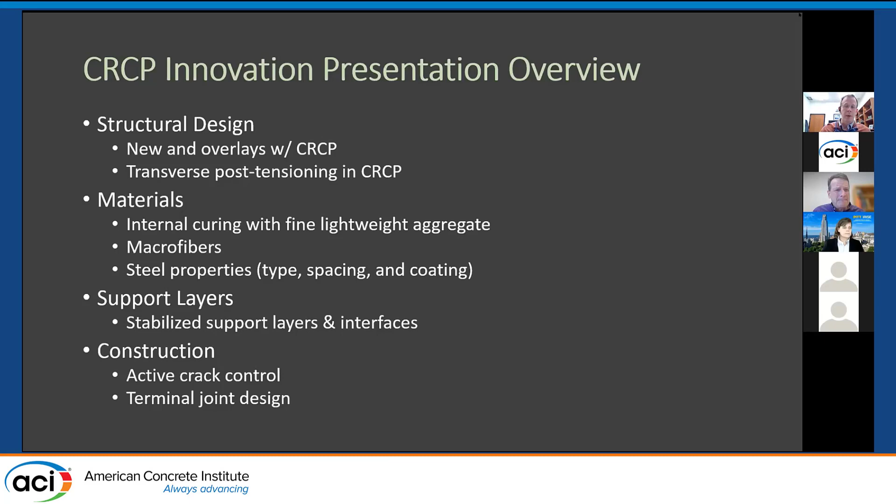And finally, as Shiraz spent a lot of time on, construction details are very important. So a few that are interesting in terms of what we found recently about them - Shiraz was involved in some of these as well - both with active crack control and terminal or transition joint designs.

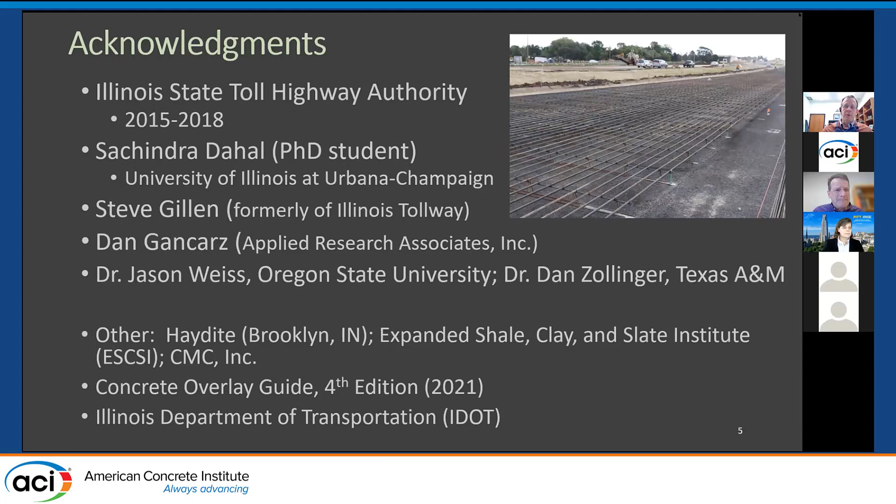So I'd like to thank the Tollway, who originally funded a lot of the stuff that we'll see. Shiraz was kind of a consultant for this project, providing feedback on this Tollway test section that allowed university professor types to build a bunch of different interesting test sections on a real live road. So a lot of what you'll see today is related to this Tollway test section.

And so as we thought about how do you make CRCP perform better and last longer and not have premature failures, you really want to avoid irregular cracking patterns. So one of the things we looked at in this recent study was how could we use internal curing possibly as a way to produce better controlled and spaced cracks, both in terms of crack width and slab dimensions.

This was their original motivation, as well as making this a very cost-effective pavement type, because you need to deal with that relative to its service life.

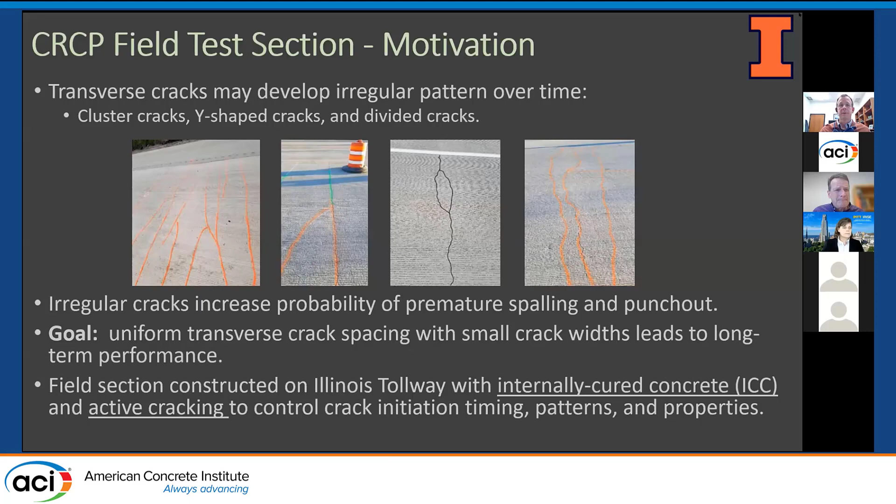If you're not familiar with internal curing, which has been used a lot on test sections on bridges, it essentially is pre-wetted saturated lightweight aggregates that are manufactured and expanded. These porous aggregates are saturated with water, and as the concrete hydrates—especially at water cement ratios below 0.4, or even above 0.4 when you lose water to the external environment—the aggregates release that internally stored water pretty easily because the pore sizes are so large. That can help provide internal curing to hydrate the cement more.

It produces a more uniform moisture gradient, which can reduce curling, as shown in some work we did—not necessarily for CRCP, but for jointed pavement. So this was one of the ideas we were going to test out.

We had Dr. Jason Weiss and Dan Zollinger on this project, and Dr. Weiss was an expert in this. So we were really excited to see how it could impact CRCP performance.

Could it change crack spacing, crack widths, and performance? For this particular project, we just replaced the sand part of the concrete mix with 37% of the fine aggregate by volume, not by weight. It's not a huge amount of replacement, but from the laboratory work, and even some field testing with slab curling, you can see a remarkable difference when you lose external water.

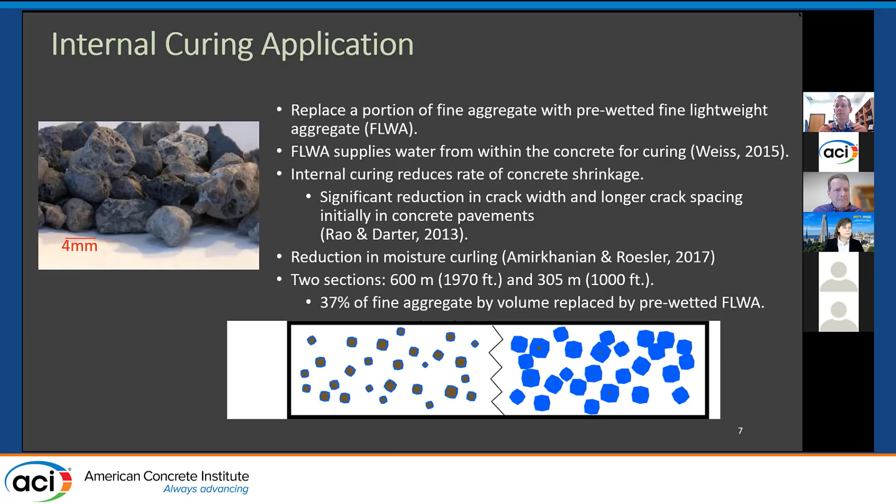Another thing we tried on this test section—and I'll show the results when I explain all the factors—besides saturated lightweight aggregates, we also looked at active crack control.

This had been originally looked at in the 90s by Dan Zollinger on some test sections in Texas. It was recent—we looked at it 20 years ago for the Illinois Department of Transportation, where we saw cuts across the slab with a soft cut. And recently in Belgium, they've cut notches in the side of CRCP.

They were a little longer than this, so we built on what they did and made partial width, partial depth notches, about 2 feet long, spaced every 4 feet, hoping to propagate those cracks in regularly spaced arrangements early, as well as keeping the crack widths tight.

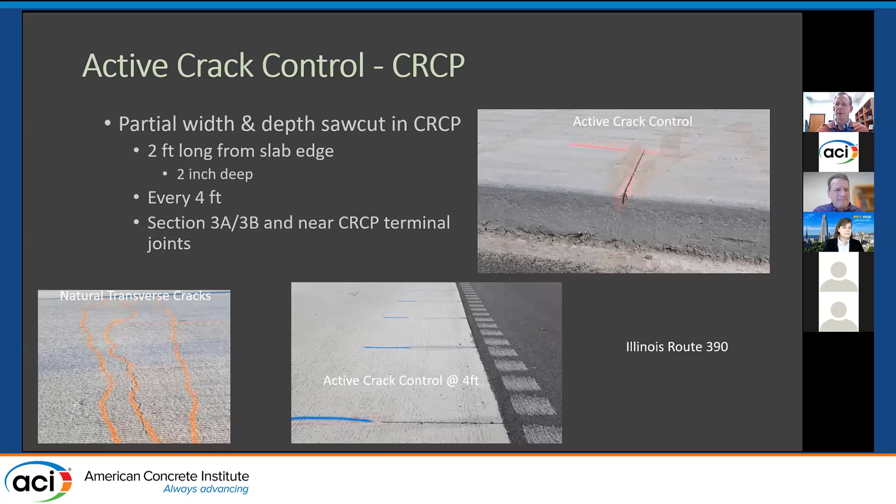We'd like cracks to happen early so that the widths are distributed appropriately and we don't have dominant cracks with very large movements or widths. We really want to avoid this clustering of cracks that can intersect and eventually give a premature spall or punch out that has little to do with being overloaded or fatigued. When too many cracks come together in one location, you can create premature failures.

This test section was located west of O'Hare, and it composed of 3 different test sections. For various reasons, they weren't all in the same exact location. Section 1 was all our internal curing.

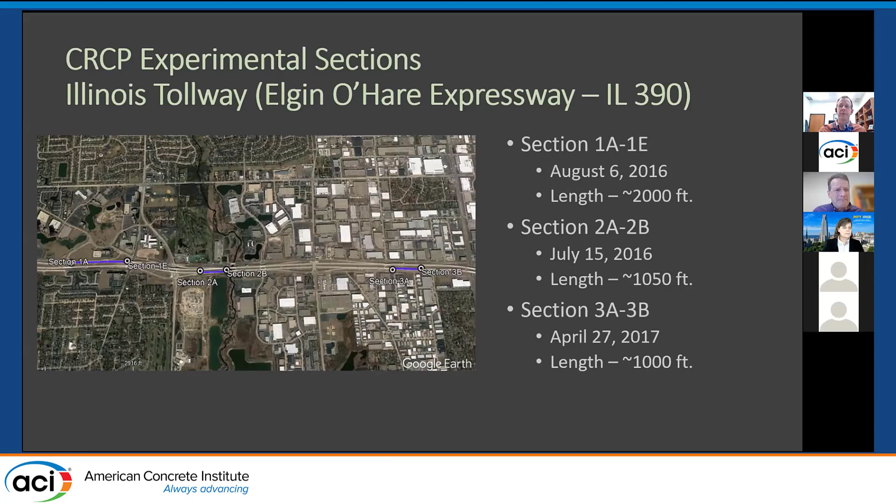Section 2 was our control section. Section 3 had various other internal curing plus fibers, plus it was a little thinner, and it also had active cracking. We appreciated this test section, but in all test sections in the field, you kind of have to go with what the engineers are doing and just make some adjustments. So we didn't control everything we wanted to.

We had several thicknesses, which wasn't ideal, but that's what we ended up getting. We had internal curing on 2 of the sections, and we did active cracking on 1 of the sections. The thing I really want to point out here is the construction time and temperatures were very different for the 3 sections that were paved.

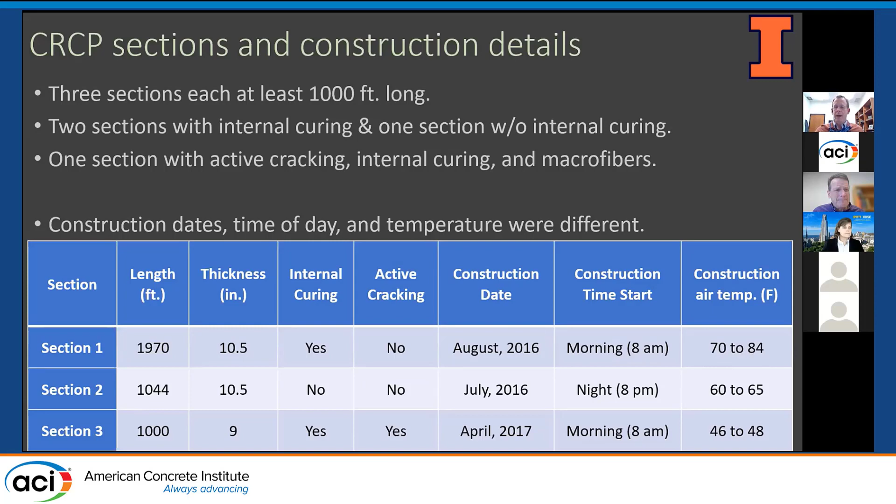One was paved, two of them were paved during the day, one was paved all night. One of them was paved at a fairly high temperature in the summer, another was paved in early spring at a very low temperature. This will likely come back to cause some behavioral differences in some of the measurements we did.

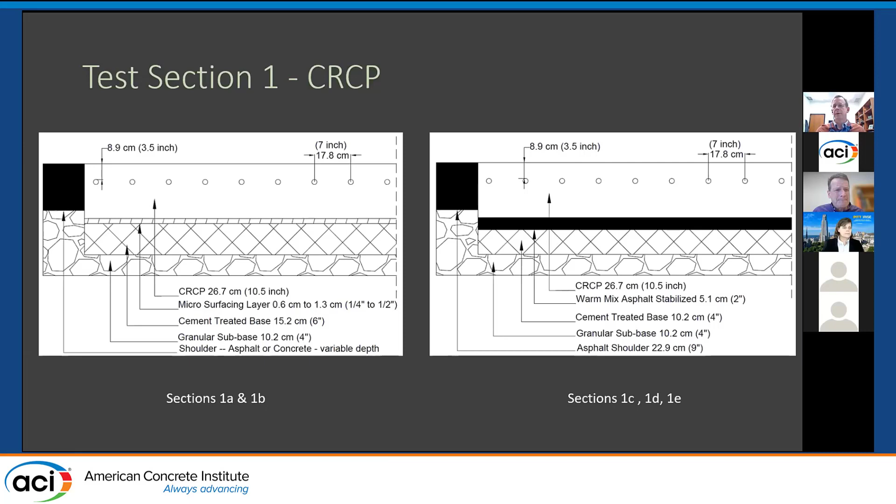So we've been monitoring this over the past 4 years, and this was just published in TRB, some of our findings. What you can see here is really the 3 sections, although they don't end up with the final crack spacing after about 4 years of monitoring. They're generally in the 4 to 5 foot range, with the smallest being section 3, which is the internal cure with the active crack control at every 4 feet. That is varying pretty close to what the target was, which was around 4 feet.

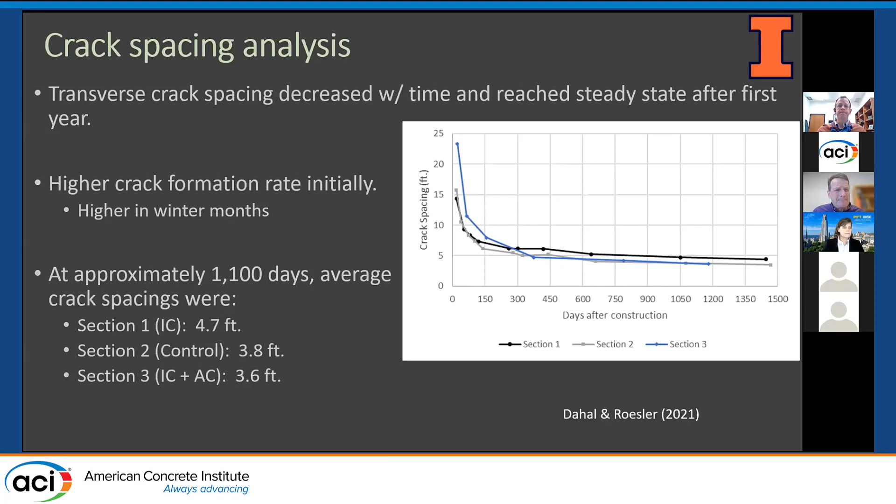But generally 1 to 2 meters are expected with crack spacings for CRCP. What's more interesting is the crack width analysis. As we look at the crack width out at 3 and 4 years, we find some interesting trends. The blue line there is section 3, with the active cracking that was paved at a cooler temperature, and it's about 0.2 millimeters pretty much the entire time it's been monitored. And that's great, the cracks are very tight.

We expect very good performance out of this section. This also has some macrofibers in half the section, further keeping the crack widths very tight. Internal curing initially had lower crack widths and has subsequently had some higher crack widths. There's some reasons for that.

One being that it was one of the hotter days that this was paved during. Anytime the temperature is really hot and then you have contraction from a very hot temperature, you're going to have larger crack widths, all things being equal. So with internal curing, trying to control crack width without controlling the concrete temperature, you have to do a little bit of both. It doesn't mean that internal curing can't have other benefits, but it's not a dominating factor in terms of only controlling crack width if everything else is the same.

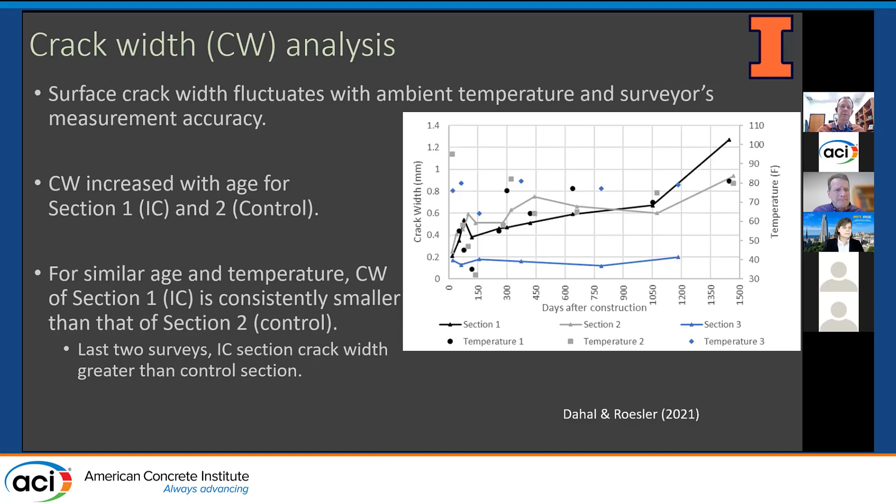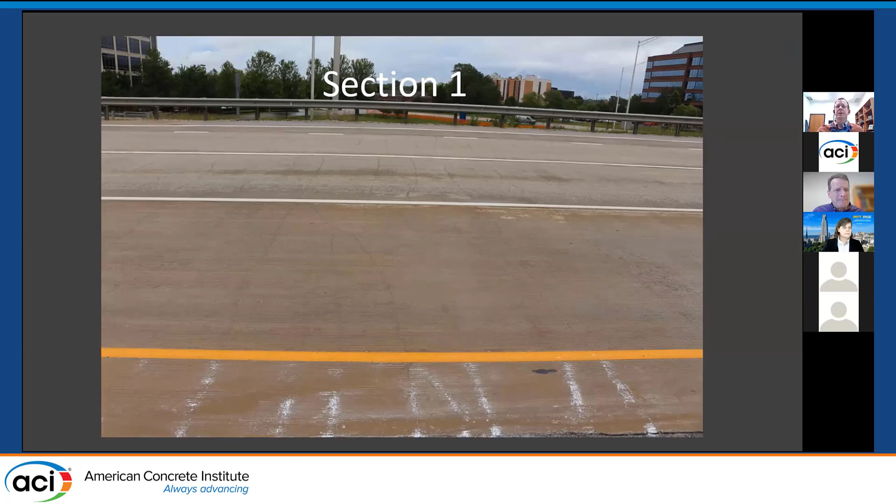And here's section 1, the internal curing section. Typical CRCP crack spacings, you should be able to see those in the 3 different lanes. And this is what it looks like in section 3 when you have these active cracks here. You can see over here in the lane, and you can see how the transverse cracks propagate from them. So we've seen very good success with these active cracks.

They're partial width, only 2 feet, so you don't have to saw cut much, and the cracks propagate across the slabs, and you don't have to saw cut. So we've seen very good results, very good small crack widths. And I'll show some more benefits of this active cracking.

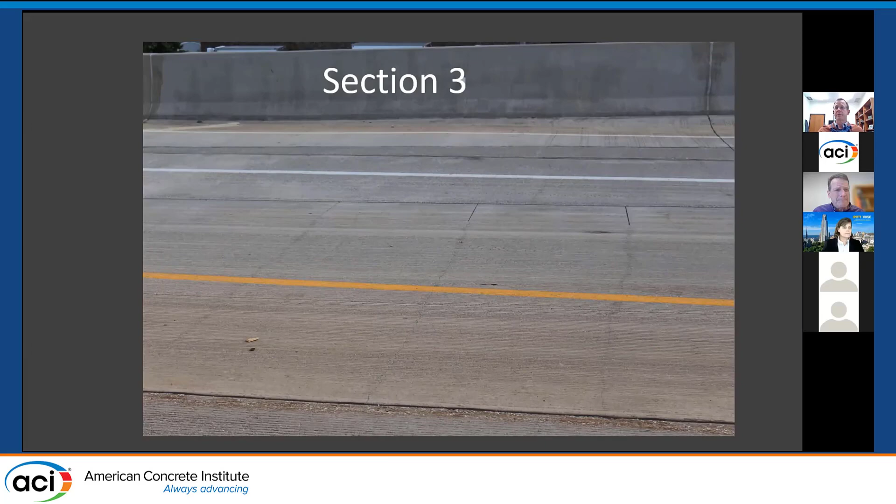One is that you see a lot of the cracks occurring early. You can see here with this chart, 71% of the notches activated in year 1. 85% of the notches have initiated a crack after the first 3 years. And of all the transverse cracks on section 3, 93% of them occur at a notch.

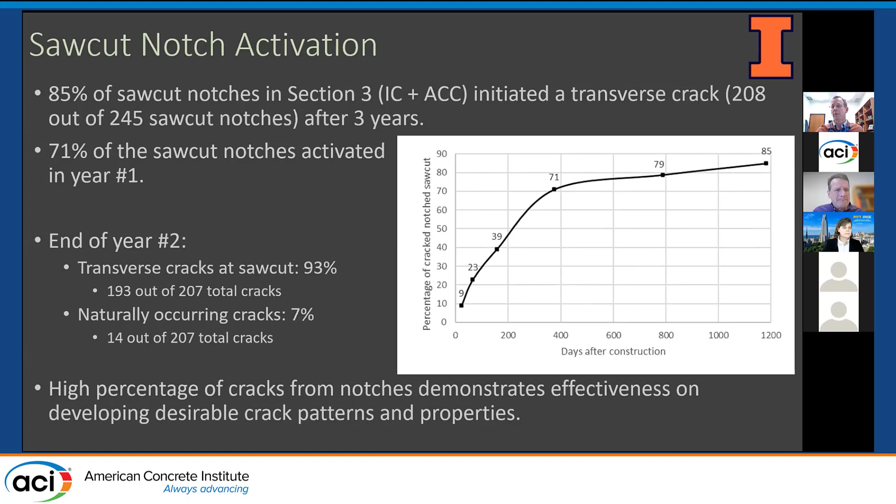So you're not getting intermediate cracks, you're not getting these multiple cracks you see in some of the other sections, even with internal curing when you compare it with the control. And the fact that we're seeing the notches propagate these cracks early says it's a good idea. We're getting regularly spaced cracks, we're not getting a lot of random cracks, and that's good news for CRCP performance.

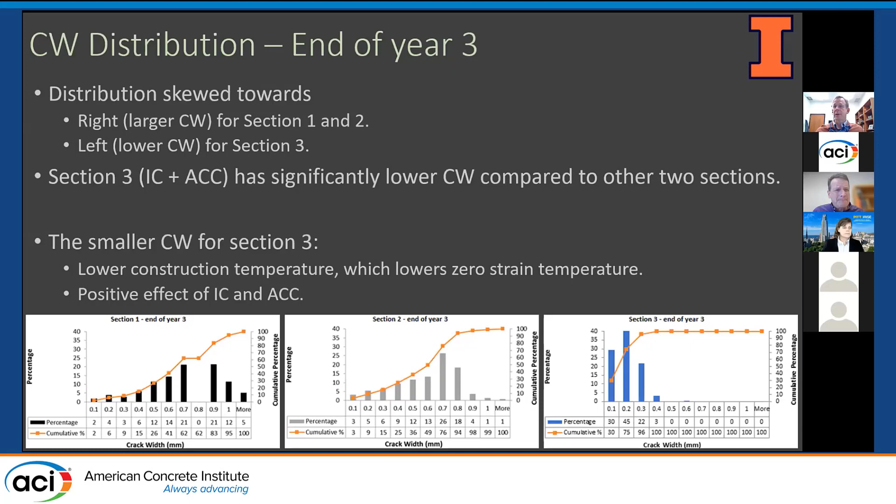If we look at the distribution of crack widths now, if we measured all the cracks in these sections, some of these are several thousand feet long, we look at a crack width measurement in every crack in every section. Of course, you can have a mean value, which as I showed earlier, but these are the distributions of those crack widths. Interestingly, section 3 at the bottom right has very small cracks, very much more uniform and very low, whereas section 1 and 2, 1 being with internal cure, section 2 being the normal, they still have this distribution of crack width, which probably is a result of the higher construction temperatures, plus the fact that we had other things going on, such as some undesirable cracks occurring.

We did do some measurements, even at the end of the 4th year, and ironically, even the internal cure section had some crack widths at the time we did the measurements. The mean value was actually higher than the control. A lot of that has to do with, I believe, the cluster cracking that's occurring in section 2, which I'll show in a second, as well as again, very high temperatures at construction.

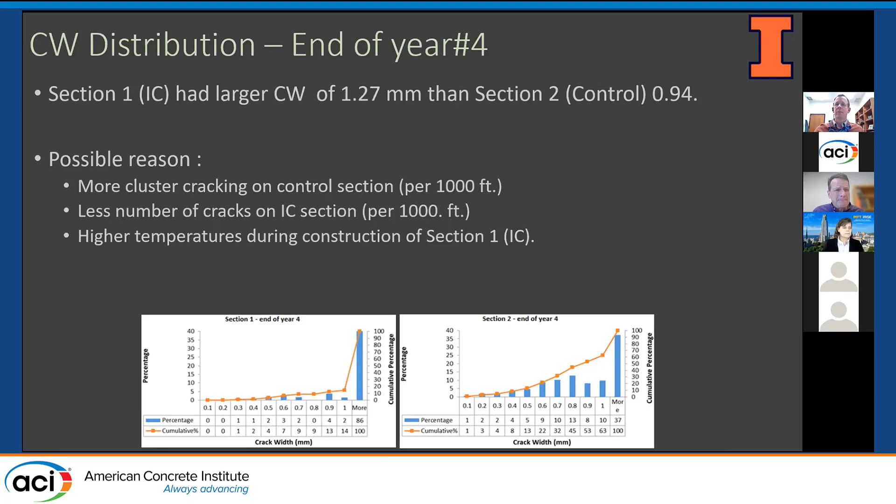So a solution or innovation in CRCP like internal curing, you still have to pay attention to other good practices about paving at high temperatures. I will say that really, all these sections are performing well. So despite my comments about crack widths, and that may not be good, we're just showing relative kind of measurements right now and not necessarily any distresses on these sections.

But let's get back to the undesirable cracks again. You can see these various undesirable cracks. So let's compare these undesirable cracks from the various sections and see how internal curing performed relative to active crack control, and then just the control normal paving concrete. By the way, these were all slip formed with generally the same types of pavers and contractors.

So what we find here is if we look at Y cracks, first Y cracks—if I jump back a slide, they're number 3 here—Y cracks actually show the highest on the control section. That's interesting, but we don't eliminate it with internal curing. Section 1, the black and blue, shows less than the control, but doesn't eliminate it. So there's something with curing and shrinkage and the rate of shrinkage that seems to be helping with internal curing.

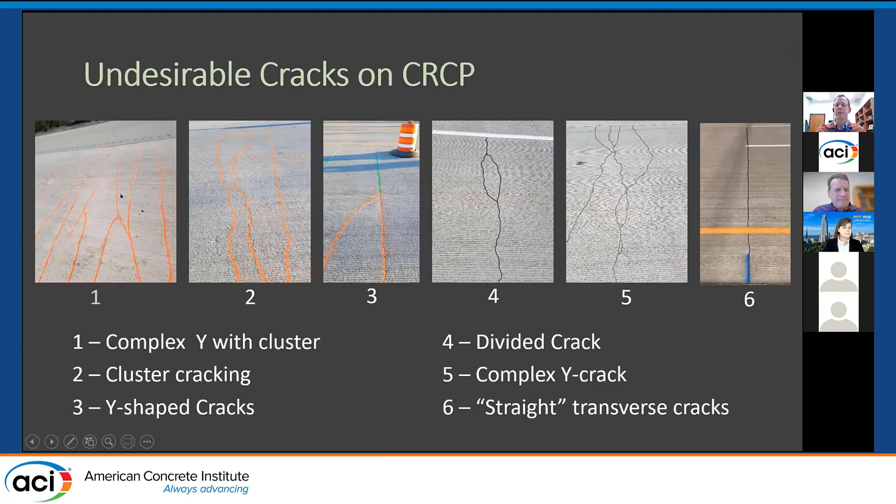When we go to complex Y cracks, which are related—complex Y cracks would be number 1, where you have some clustering and a bunch of cracks that come off other cracks—you see again we've reduced those significantly with internal curing and active crack control for that matter. That's the blue. Divided cracks, again, same conclusion: we're not eliminating them, but getting them very small relative to the control.

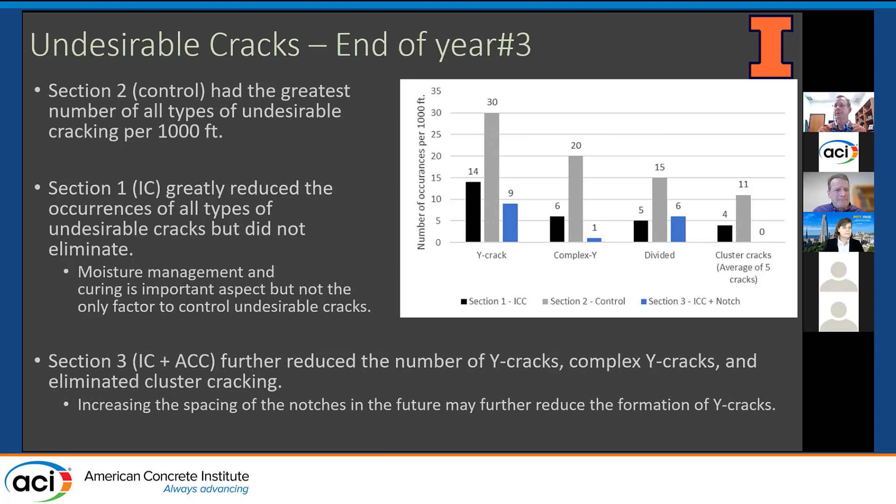That's all good news. Now we get to cluster cracking. When we go with internal curing, notching the slab, we actually eliminate cluster cracking. Shiraz and Dan Zollinger had come up with a way of defining cluster cracking, and that's what we used to define it in this project. So the good news is cluster cracking, or a lot of these undesirable cracks, can be minimized, some eliminated, with internal curing and good partial width, partial depth cracks notched at the side. That bodes well for premature distress on CRCP. So that kind of wraps up the Tollway project.

Part of the Tollway project involved other innovations, and Dan Zollinger came up with some ideas on post-tensioning CRCP. In the transverse direction, your tensile stresses are the highest in CRCP. So his idea was to come up with a way to transversely post-tension a CRCP section, reducing that lateral stress by compressing the slab in its width direction with solid bars that have plastic sleeves around them. We built some test sections in Victoria, Texas to do this.

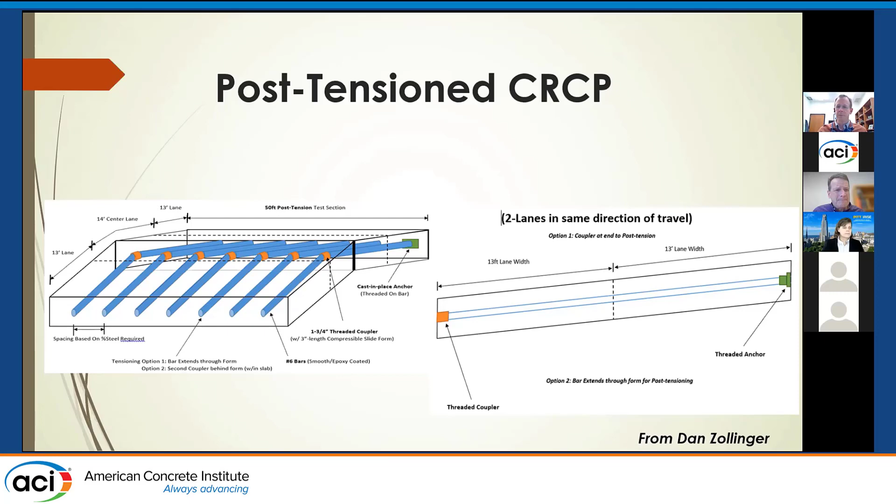The verdict's still out on this, but the concept—Dan Zollinger has a report on this as part of our Tollway project—shows there's some value in post-tensioning CRCP. You do get a thickness reduction. The question is how you can build this efficiently and get the tensioning you need in the transverse direction. So these test sections exist, and I'm sure Dan's going to continue to monitor those.

Now let's jump to support layers, which sometimes you're kind of left with—if you're building a new pavement you can pick your support layers. Sometimes you'd prefer not to move the support layers around and instead use other recycled material on the job site. So how do we assess whether a support layer is acceptable, both in terms of its erosion resistance, as we heard from Julie in the last talk, its friction, and its composite action? We know asphalt's been really good under CRCP, and if you can spend as much money as you want, you can build thick, dense graded asphalt under CRCP and it does well. But what about reconstruction projects where you have recycled materials available—recycled concrete, or it may be cheaper to supply a cement stabilized layer beneath it?

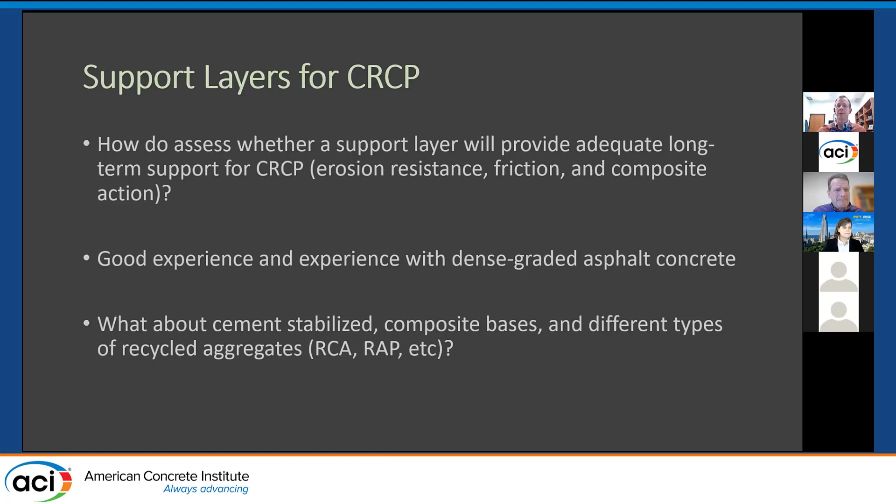What can I do to evaluate whether these are going to work without building tons of test sections? One thing, from our Tollway project, is to evaluate existing CRCPs and look at how well different base layers are providing composite action and friction. In this case, on the Tollway section, this effective thickness is the concrete thickness plus the base thickness. Concrete thickness is around 10.5 inches. The base can be anywhere from 4 to 6, but it's a lightly cemented base, and you can see that effective thickness makes the slab behave like it's somewhere in the 13 to 14-inch range, which is pretty good for normal truck traffic. You're not going to need much more than 12 or 13 inches of total CRCP thickness—this is behaving like it's much thicker because of the nice support, friction, and stiffness of the underlying base layer.

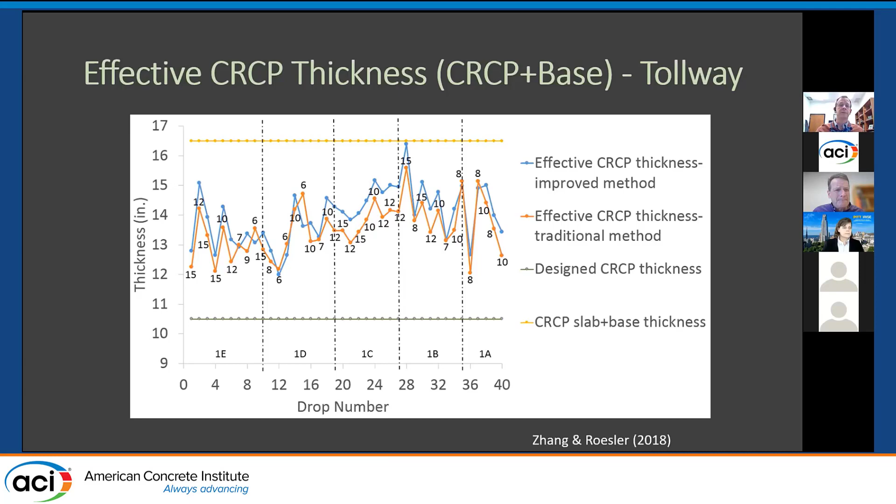The other thing that's super important, as alluded to in the last presentation, is erosion. Dan's come up with this nice Hamburg wheel testing idea. You can evaluate the erodibility under the Hamburg test, which is primarily used for asphalt permanent deformation under higher temperature tests.

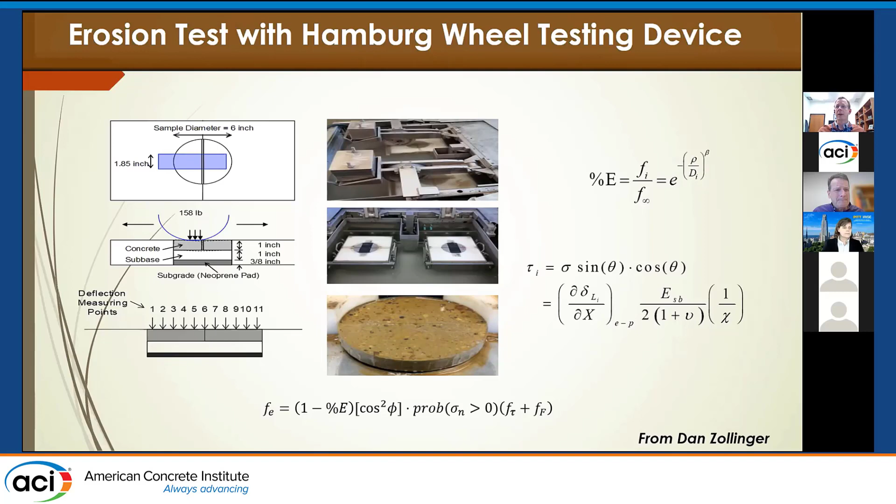Under this action of higher temperature and water and a rolling steel wheel, you can evaluate the erodibility of a base layer that's maybe too lightly cemented, or a recycled mix that's been cemented, and come up with criteria that would be acceptable under CRCP, which are going to have higher deflections than a typical jointed section due to the closer crack spacings. So this Hamburg device is definitely a good idea to look at the stability of alternative base types under CRCP pavements.

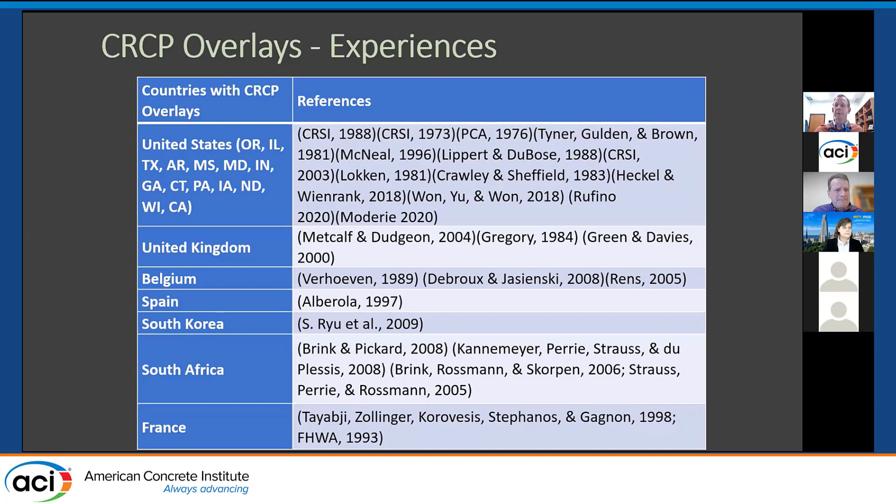My final topic is really talking about what's going on with CRCP overlays. We can talk about building brand new CRCP, but really a lot of existing roadways are already out there, and really the options are asphalt overlay, concrete overlay, or reconstruct. The good news is there's a lot of experience with CRCP overlays, not just in the US but all over the world, so engineers listening have a lot of information. The new overlay guide coming out soon, probably in April, from CP Tech Center will have a chapter on CRCP overlay, and you can look up the references.

Illinois, where I live, has good experience with 7 major projects with CRCP overlay, the last being a project in more southern Illinois. Obviously, a lot of these overlays are in more rural areas where you can have a lot of freedom with the grade, the shoulders, the ramps, not many bridges. But it's a very viable option, especially in states where you have a lot of traffic and you want low maintenance and long life.

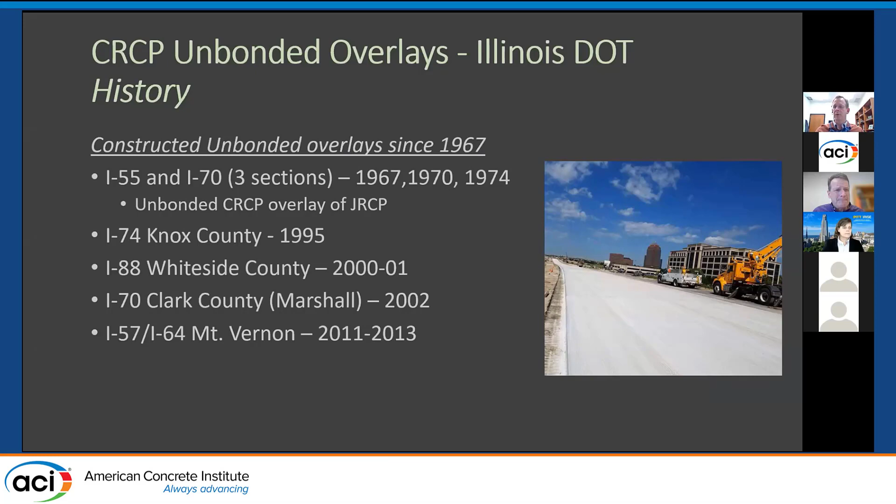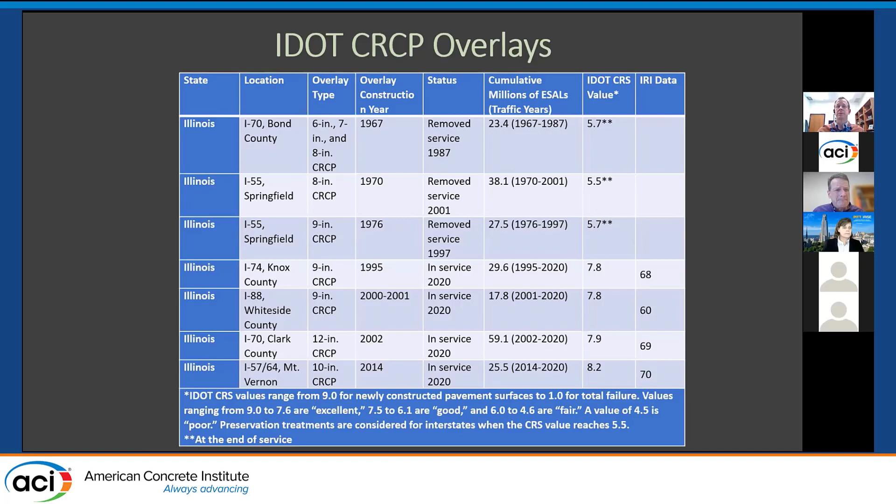And the life cycle cost on this, if you look at a 30-year or even 25-year period, will show CRCP overlays are a great choice. One of the things we're seeing in Illinois, some CRCP built in 1995 have very great ride quality, very high condition rating numbers, and very thin 9-inch CRCP over an existing jointed reinforced pavement. It's 26 years old and this is going to last 30 years, no problem. Even some of the ones built in the early 2000s have very high condition ratings and very low IRIs on those sections. This is one of the heavier traveled overlays done in Illinois, on I-70, a big truck route going through Illinois.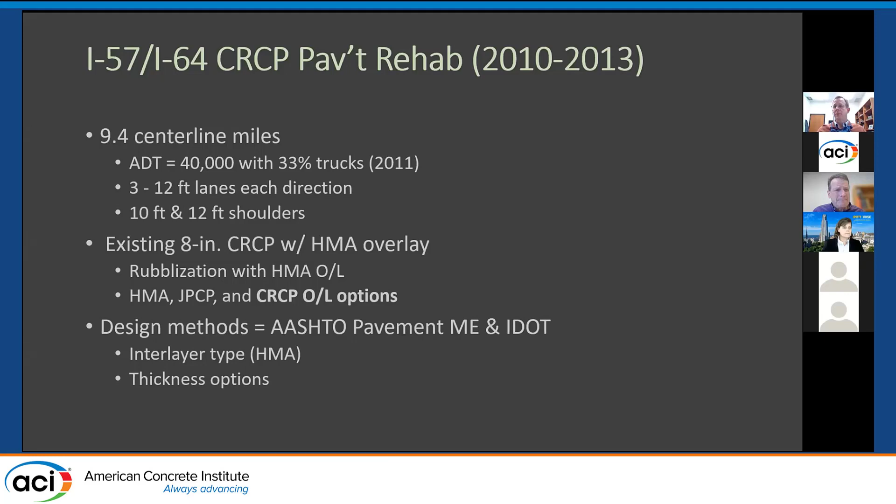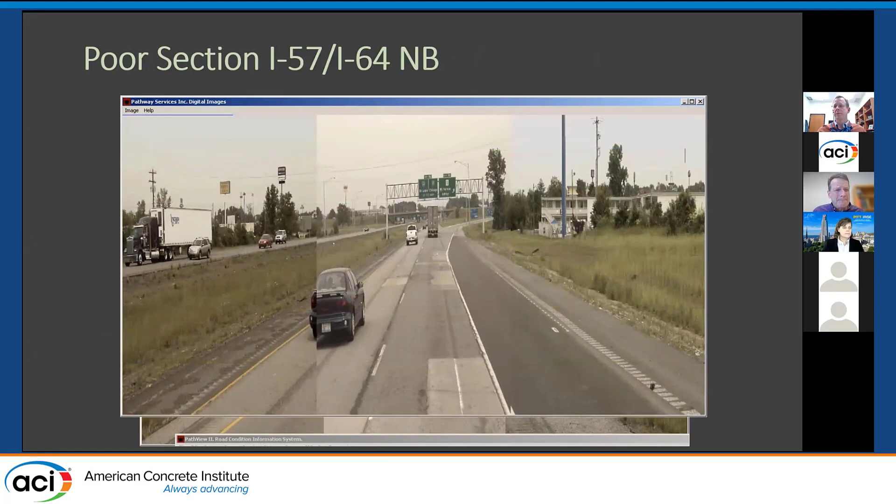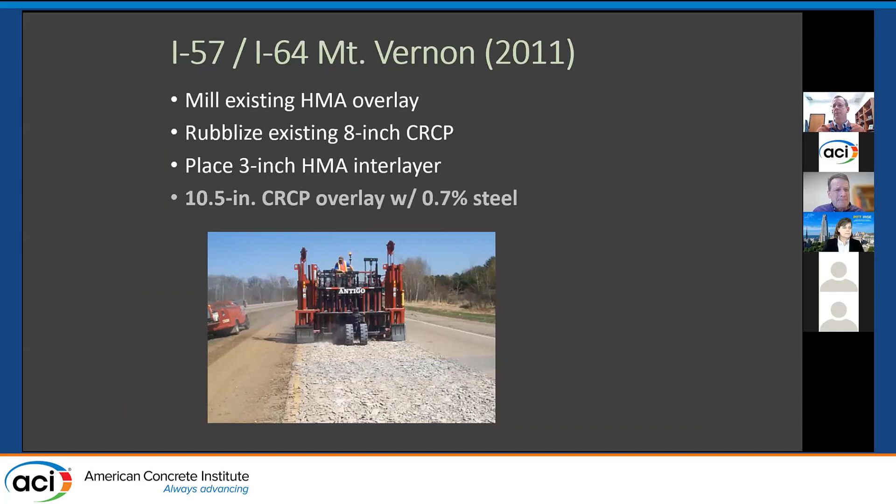One of the projects I was involved in about 8 years ago was down at the intersection of I-57 and I-64. This had a slight twist where the existing roadway had a lot of punchouts and durability cracking and was very distressed. So could we do something other than just overlay with CRCP, or do a total reconstruction? What was found is for the majority of this section, or a large part of it, we could rubblize the existing concrete, put it down as a layer, and then build a 10.5-inch CRCP over that to provide that long life, low maintenance type concrete roadway.

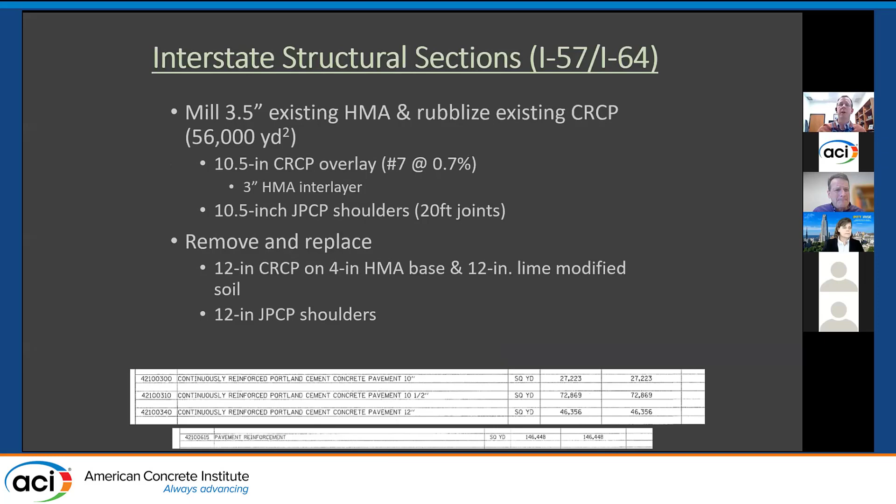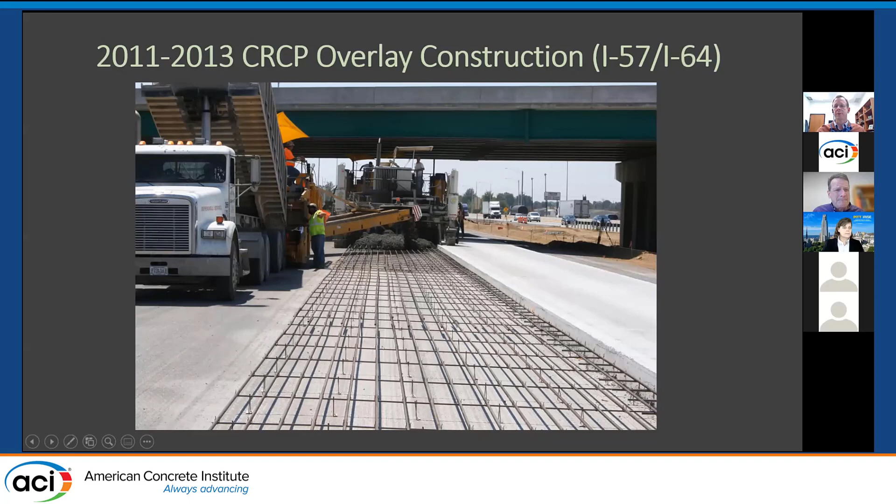And that was what IDOT chose. It turned out to be a 10.5-inch section. Like I said, they did do some reconstruction on some sections with 12-inch CRCP. But this primary project, the difference was the overlay was on rubblized concrete, and not what's traditionally done, where you rubblize the concrete and then put asphalt completely on top of it. This is a picture of that, where you have the interlayer of asphalt here, your black steel, and your overlay material. Your existing CRCP is obviously below both of these layers.

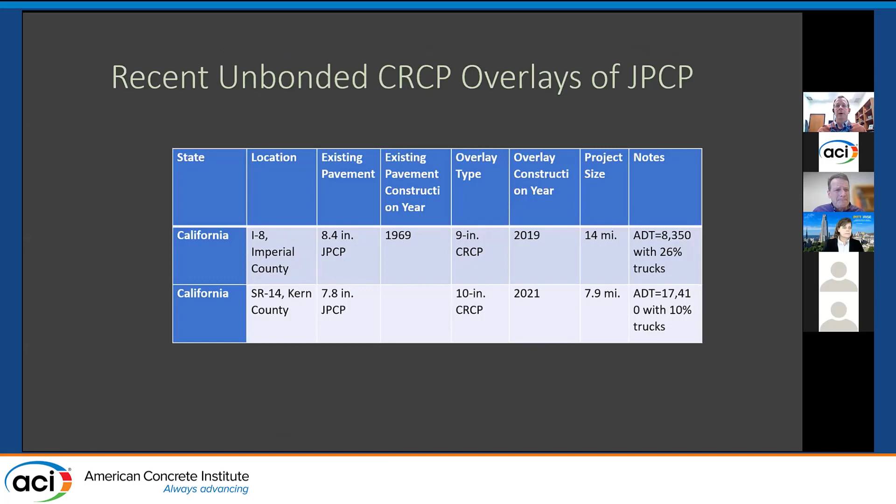Just a couple other things before I wrap up. California has really gotten into overlays now. They have 2 projects built, overlaying jointed plain concrete with relatively thin CRCP, in pretty heavy truck routes in Southern California. That's covered in this upcoming CP Tech report.

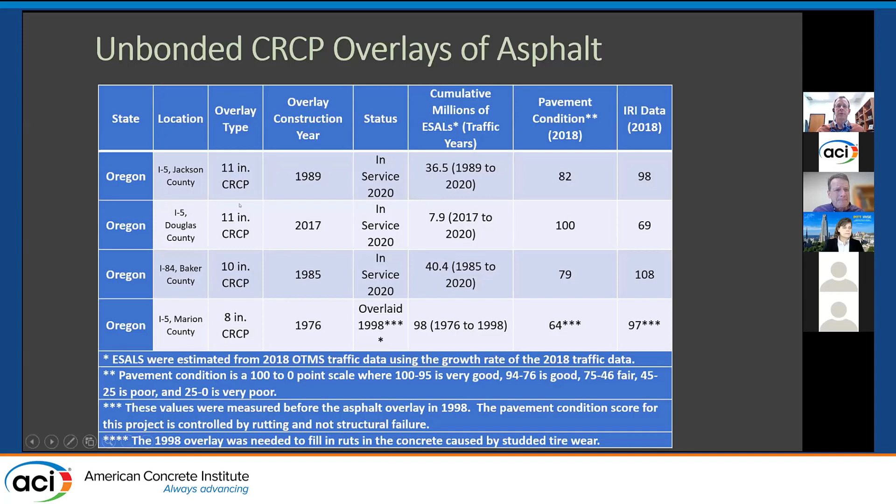Oregon's another special case with studded tires. A lot of their interstate built out of asphalt had worn out wheel paths, so they started overlaying their asphalt interstate highways with CRCP, and had very good performance, very good ride after more than 20 and more than 30 years for some of these. They recently built another one of these sections over asphalt in 2017.

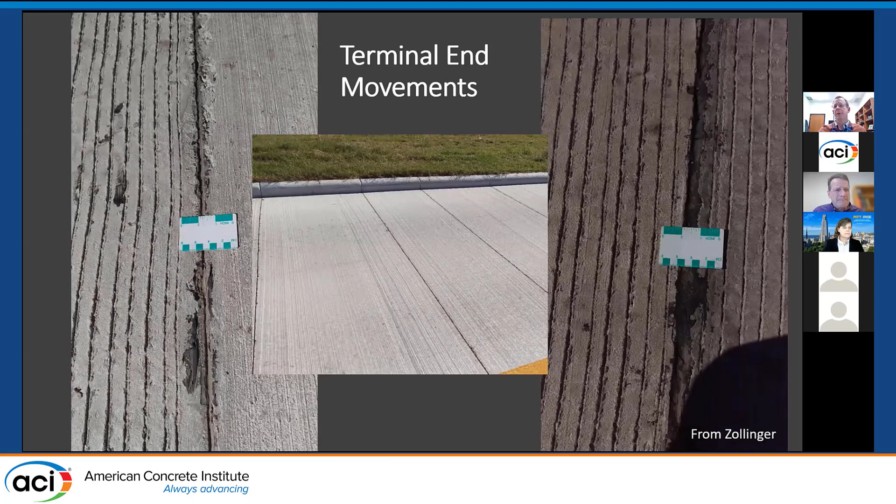One last thing: terminal end movements in CRCP could be a problem. This is where the CRCP comes up against a bridge or an existing roadway of a different type, could be asphalt, could be jointed plain, so the CRCP has a lot of movement at that end. Shiraz came up with some new ideas on this transition slab detail, and that was actually implemented at the Tollway. These are very complicated to construct. Kudos to Shiraz for coming up with a new idea around transition slabs that are easier to construct and limit the movement at those joints so you can seal them. So these details are important.

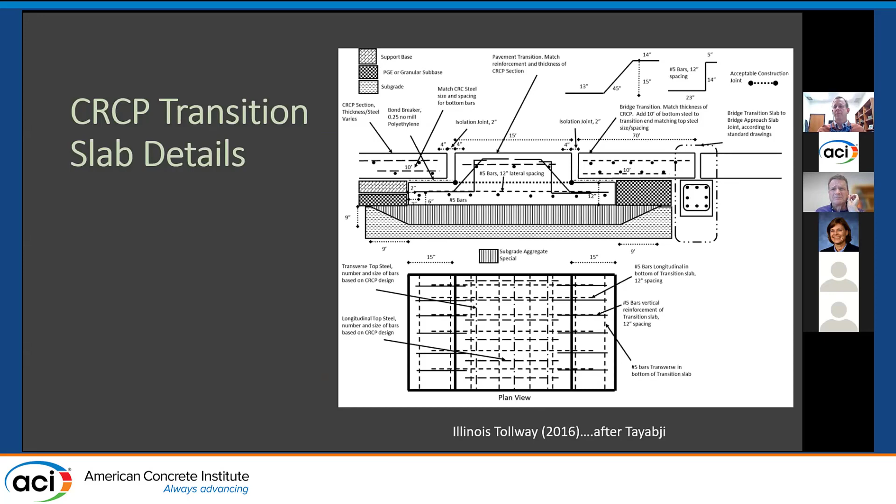I know we're almost out of time here, so I won't read my summary, but there are innovations - Shiraz has been involved in a lot of innovations. I'm sure he's going to continue to be engaged, at slightly less commitment time, but it's exciting to be part of his journey and see what he's done in his career. So thanks, Kurt.